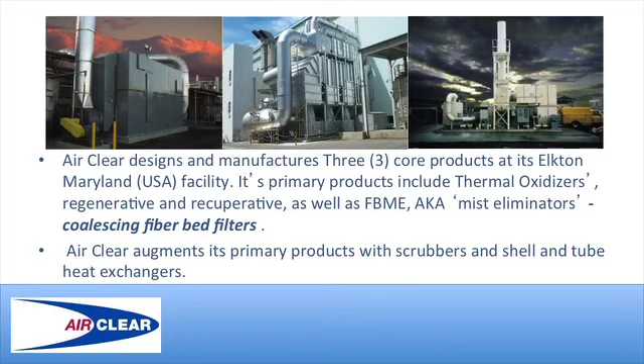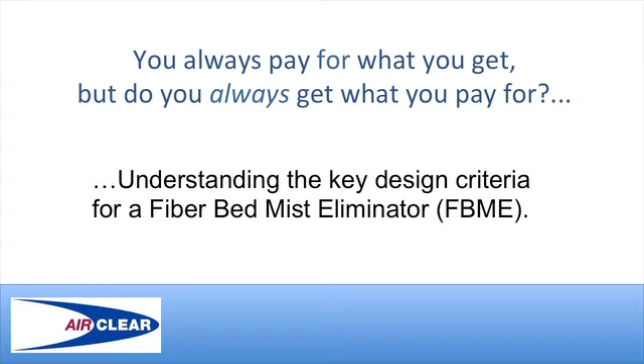Even when you get what you pay for, did you get the most value for your money? Yes, that may be a better way to phrase the question. But regardless of how you state it, understanding the key design criteria for the design of a fiberbed mist eliminator is an essential step to a successful project.

Rich, some of our participants may not fully understand exactly how a fiberbed mist eliminator works. Can you explain the primary mechanics involved in the filtration process? The fiberbed filters work by interception, impaction, and Brownian motion. Each removes particles in different size ranges and allows the liquid aerosol to be coalesced into larger droplets where gravity can move them down into the bottom of the sump.

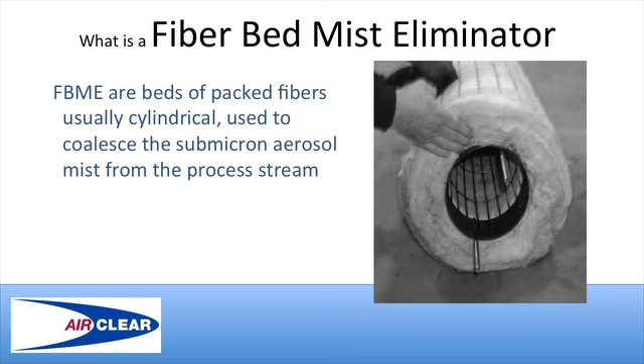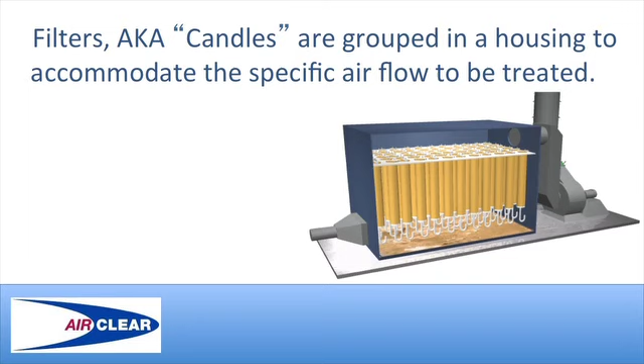The filter elements themselves are referred to in many different ways. The name candles came about because of their long cylindrical shape, similar to a candle. Fiberbeds, coalescing filter, fiberbed mist collectors, or just plain filters - all of these names are used interchangeably. The number of filters is determined by the airflow, cubic feet per minute, and the design velocity range selected.

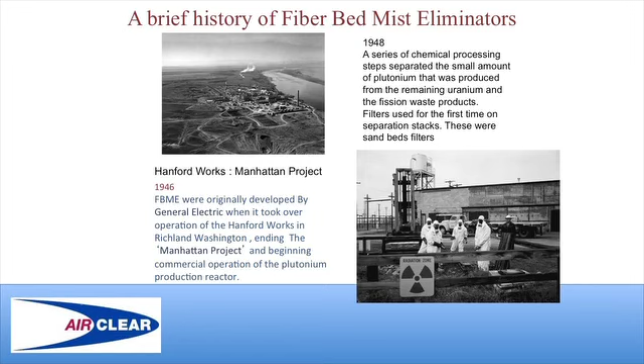To best understand this time-proven technology, I think a brief look at its origin would be worthwhile. The mist eliminators were developed at the Hanford Project in Washington in the late 1940s. They were doing some work for the government where they had some aerosol mists that they definitely did not want to get into the atmosphere. So they developed the research project to come up with the best filters to remove aerosol mists. The final design report, which was developed by General Electric, who was the contractor for the Atomic Energy Commission, is extensive and full of great technical data collected during the research and development phase.

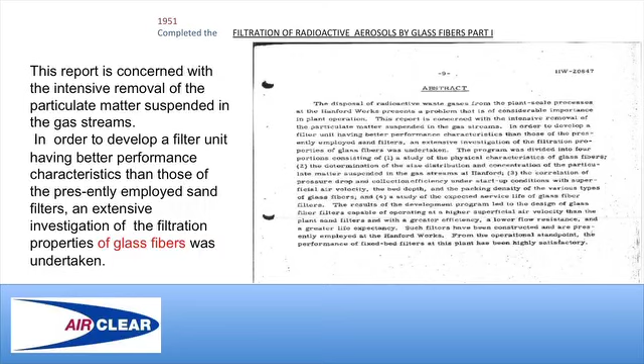I find the way the team worked together to find a solution to a very difficult process is very impressive. The detail that they went into in this test was very impressive. For example, they changed the conditions of the superficial air velocity, the bed depth, the packing density, the types of glass, types of fibers, and a study of the expected service life of the glass fiber filters.

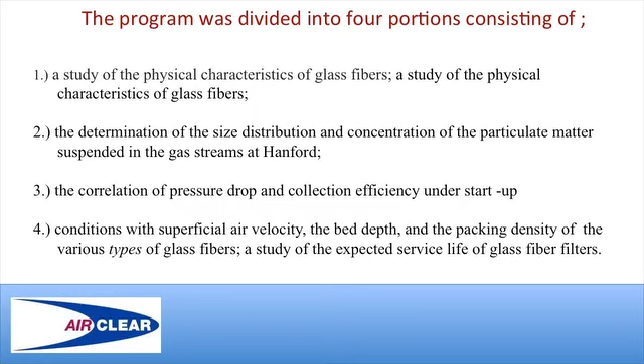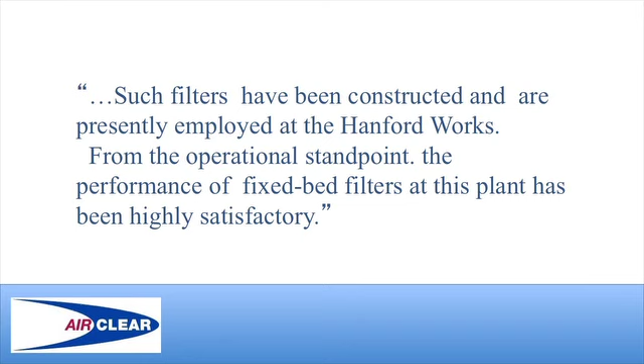Literally, we are just hitting on a few of the key points in very general terms in this discussion. The background is important because the design criteria investigated and developed by General Electric and the AEC at that time are still in use today. The bottom line from this study, as we can see in this statement, is the team was very pleased with their findings to develop a filter that removes such a high percentage of the aerosol mist.

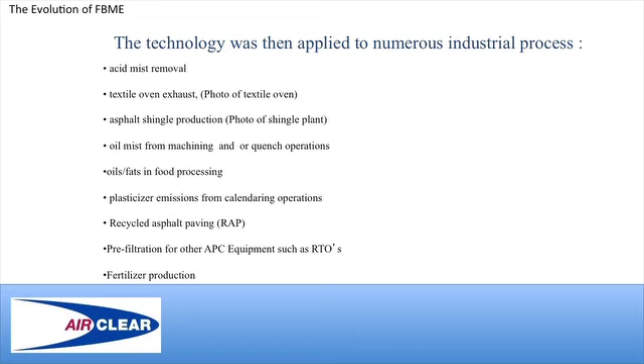As so often happens with technology, over the years it is adapted and applied to other areas. And as technology evolves, it moves into different industries and becomes an industry in its own right. And that's really what happened with fiberbed mist eliminators. Numerous processes have been cost-effectively filtered, preventing incalculable tons of emissions from entering the atmosphere.

Okay, we know now how well the fiberbed mist eliminators work and for how long they have been doing this job. There are really three primary objectives that are critical in designing an air pollution control system. Well, first, an engineer has to be certain that the performance will meet the air emission regulations that they are required to meet. And next, he also has to minimize the cost. Throwing money at a problem seldom is a good solution. And finally, the engineer must want a system that has minimal impact on the bottom line, low operating cost and maintenance cost. Yes, and that's how we all keep our jobs.

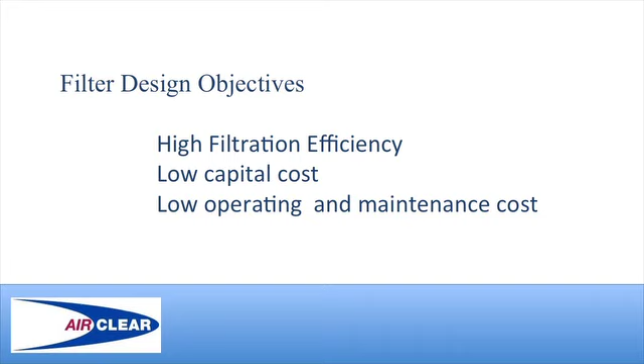Let's look at the most important aspects for the design of a fiber mist eliminator. Design of the fibers themselves relates to the system's overall efficiency and durability.

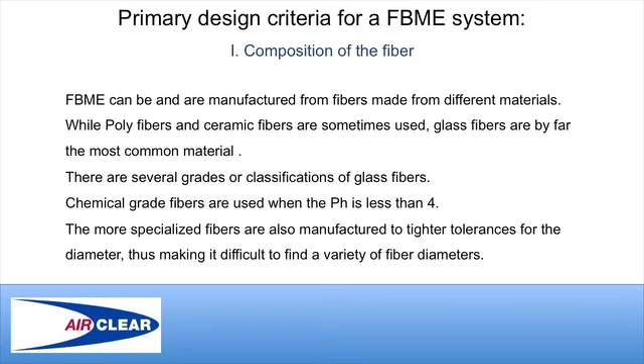The fiber diameter and the material used to make the fibers are key elements in the design. True, but the selection of fiber diameter and material are generally outside of the plant engineer's control—they are under the system provider's fundamental design. Yes, but asking the right questions about the fibers can help avoid a costly mistake.

The Hanford report does a great job of explaining how important the fibers are in the removal of particulate. Smaller fibers, less than 5 microns, contribute to removal of submicron particulate, and they generally restrict the fluid drain rate. 5 to 15 micron fibers remove large particulate and facilitate fluid draining.

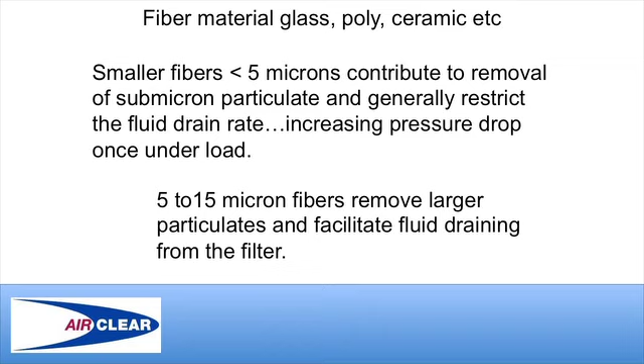Speaking of the importance of fiber selection and the technology evolving over time, I'm very excited about a new high-temperature ceramic filter which works up to 2,500 degrees Fahrenheit. Although these filters are not used for aerosol, they do present new opportunities for high-temperature filtration of solids.

The report tested various bed depths, with some up to a foot thick. It may seem odd to us now, but remember they had sand filters several feet thick that they were replacing, so 12 inches was reasonable for their research. Now, once again, the bed depth falls largely into the system provider's design criteria, but it is important to understand the impact that bed depth has on the design.

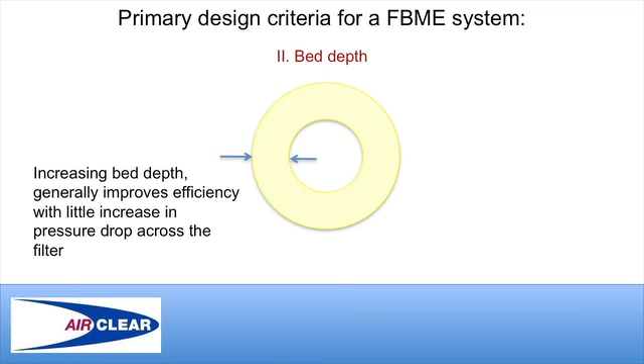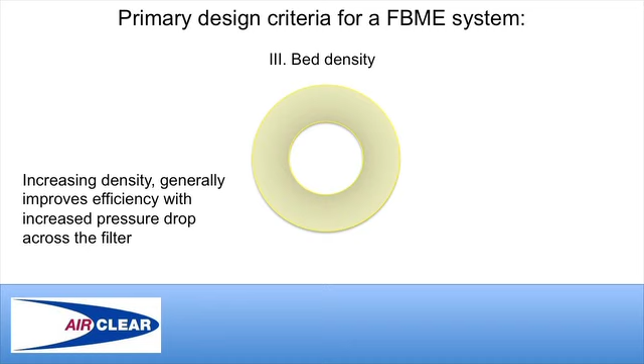Yes, but we have a few special designs, each unique to a customer's process. As a rule, increasing bed depth generally improves efficiency with little increase in pressure drop across the filter. Bed depth and bed density generally work together with respect to efficiency and pressure drop. Yes, they do—you can increase the density. Increasing density generally improves efficiency with an increased pressure drop.

Surface area is really where decision makers have a choice in the design process. The Hanford report demonstrated that fiber bed mist eliminators have a substantial operating range—that is, they function in terms of collection efficiency between 10 and 40 feet per minute. Increased surface area equals slower bed velocity, improved draining of liquids, thus a lower pressure drop.

Increased surface area also means that there is more dirty side surface with more holding capacity for solid particulates if they are present. Generally, it is a safer design that is adaptable to more processes. Slower bed velocity is also the most costly option. But is it? Certainly it is more costly capital cost-wise, but how about total cost?

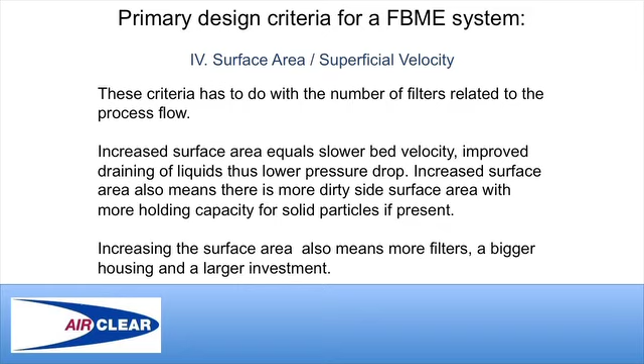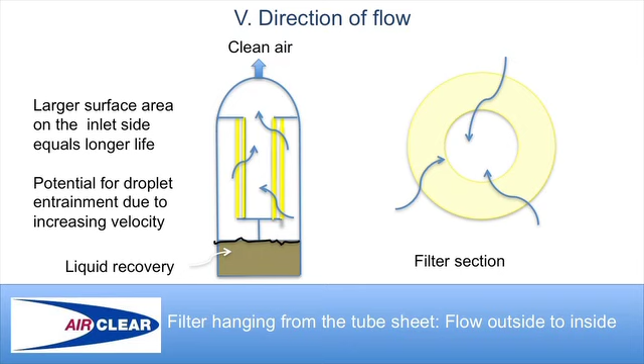There are a couple of ways to support the filters. With hanging filters, you have a larger surface on the inlet side, which equals a longer life. Please note the liquid recovery section on the left illustration. When the mist is coalesced into liquid droplets, the drops drain down into the sump and eventually have to be removed. The filters can sit on the tube sheet, and this method drains well, but in general it has a shorter life because there is less filter area on the inside diameter versus the outside diameter.

There is also less potential, however, for droplet entrainment due to the decreasing velocity as the air moves from the smaller inside diameter to the larger outside diameter.

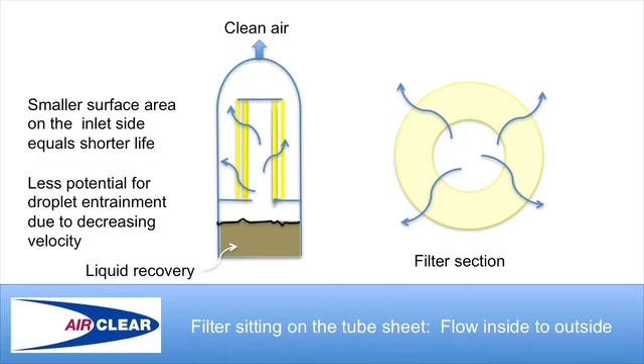So how does the selection committee use the design criteria to make a selection on competing systems? That's really the question. Let's take a look at a very real case study where we associate costs for 3 systems with different velocities and compare them side by side. We have provided a number of similar projects to this, so the data is representative and should be very useful.

It's for an asphalt roofing saturator and coater: 10,000 ACFM at 100 to 120 degrees Fahrenheit, moderate aerosol loading, roughly 5 pounds per hour, operating 4,000 hours a year, with electric cost at 12 cents a kilowatt hour, and 3 flow velocities across the face of the filter—15, 30, and 40 feet per minute.

The curves in the Hanford report that correlate velocity with pressure drop were also helpful here in defining what the pressure drops and subsequent energy costs will be at the different velocities.

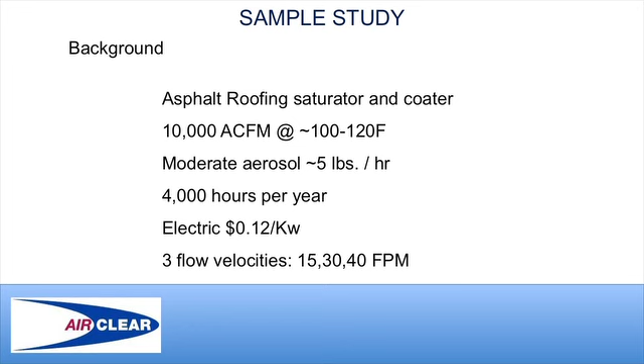Moving over to the third column, we've converted that into kilowatts. The next column applies the 12 cents per kilowatt, and we get dollars per hour. Multiplying by the 4,000 hours a year of operation, we finally end up in the final column with electric cost per year. So as you see in the first line, we have $4,117.92 if the filter system were to operate at 2 inches of pressure drop for the entire 4,000 hours. These pressure drops are average pressure drops as we apply them down in the next few slides.

The 22-inch extreme on the bottom equates to $19,264.70. So you can see the effect pretty dramatically that pressure drop has on the operating cost.

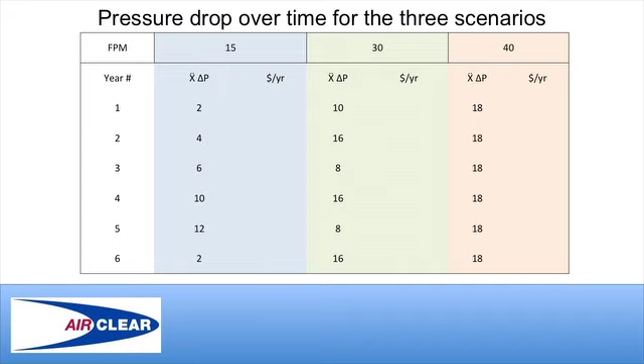In the other areas under the 30 feet per minute, the pressure drop is 10, 16, 8, 16, 8, and 16. The reason for these different pressure drops has to do with the life of the filters, when they reach capacity and have to be changed out.

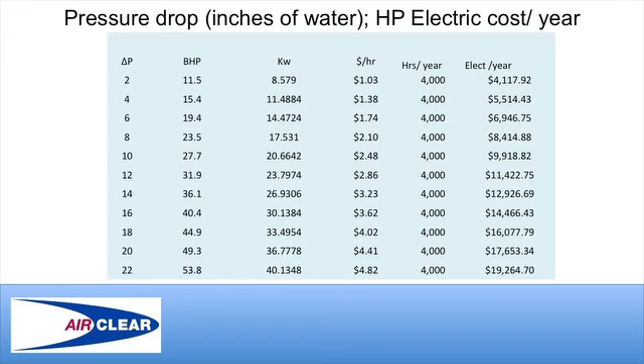We're jumping back to the previous slide for a second just so you can see where the operating cost comes from for the different pressure drops. You'll see the delta P on the left, and on the right side the electric cost per year.

In the 30 feet per minute, the filter pressure drop averages 8 inches at $8,415 per year, and the 40 feet per minute, 18 inches at $16,078 per year. So you can see the effect of having a higher velocity, higher pressure drop system is costing more per year for electric use.

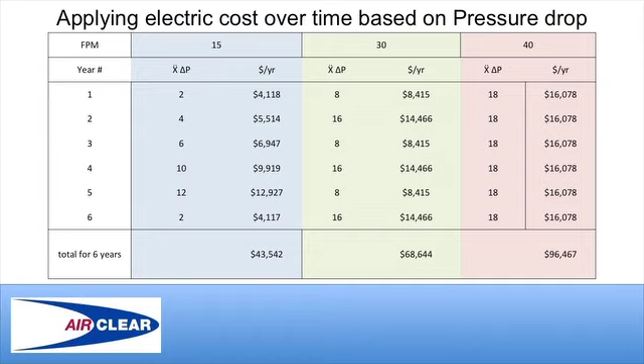The difference in these electrical costs is substantial when we add it up over the life of the equipment. Another major contributor to the overall cost of the unit is the filter replacement cost.

With the 15 feet per minute, there are more filters, so the filters last longer. There's 40 filter elements, and the replacement cost at the end of their 5-year life is $30,000.

With the 30 feet per minute, there's only 20 filters, but you have to replace them every second year, and that's $22,000 every time you replace them.

With the 40 feet per minute face velocity, there's only 15 filters. You have to replace them every year, at a cost of $19,700 for the filters.

The pressure drop and the replacement filter cost are interrelated because the fan horsepower is finite, and once it reaches the filter's capacity, the filters need to be replaced to allow for the flows that we need. In other words, as the filters restrict and the horsepower is at capacity, we can no longer get the flow, so we have to change the filters.

Also, increased velocity means that the draining is slower, which also affects the delta P.

The filter life at the 15 feet per minute face velocity for 40 filters is 5 years versus 1 year for the 40 foot per minute face velocity. When you think about it, a 40 feet per minute system has to do the same amount of work as a 15 feet per minute system with less filters and less surface area.

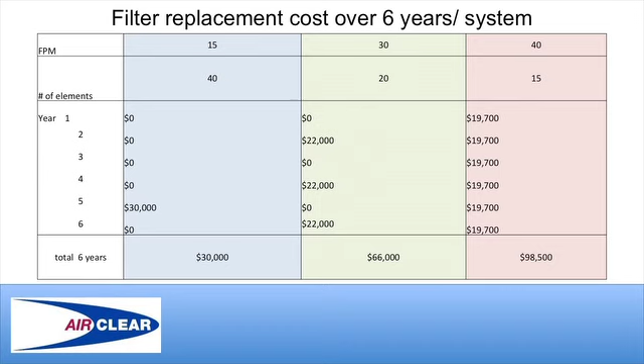After a 6-year time period, your 15 feet per minute filters total cost of ownership is $188,000. The 30 feet per minute total cost of ownership is $224,000. With the 40 feet per minute, total cost of ownership is $259,000.

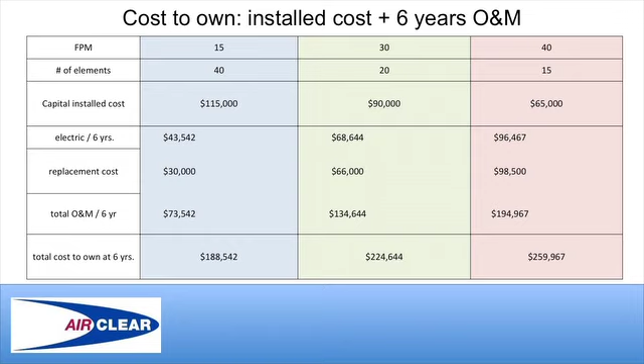That's based on 6 years, and really, that period could be extended out somewhat. We have some units out there approaching 40 years of operation. I'd say 20 years is a very reasonable average life for these types of systems. It's obvious, if you have the capital, it's a good long-term investment to go with the slower velocity design.

The case study we just reviewed deals with some real applications. However, it's a very straightforward case. The process temperature was an ideal 100 to 120 degrees. But we know there are other factors that sometimes influence system cost as well.

Yes, as mentioned, temperature is one big factor. However, in some cases, solid particulate is a big issue.

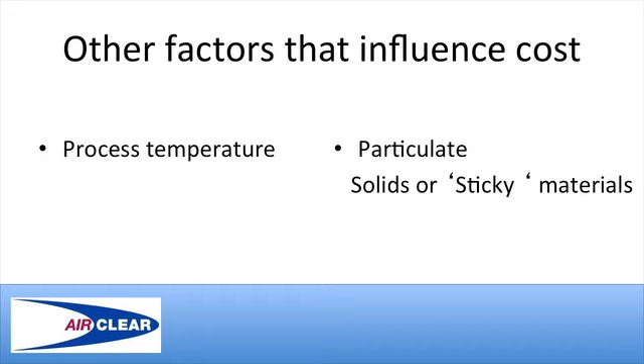Rich, perhaps you can explain how the process temperature impacts the design of a filter fiberbed mist eliminator.

Sure. Remember that a fiberbed mist eliminator is a device used to remove liquid aerosol from processes. An aerosol is a liquid droplet. Therefore, if the temperature is too hot, the organic material, oil, etc., is in a vapor form and will pass through the fiberbed without coalescing, and therefore not be removed.

The question is precisely what temperature do we need to be at to achieve the desired results? The answer varies based on the materials to be removed, but in general, a process temperature of around 120 degrees will give us about 99% removal efficiency of 0.1 microns. So remember, cooler is better.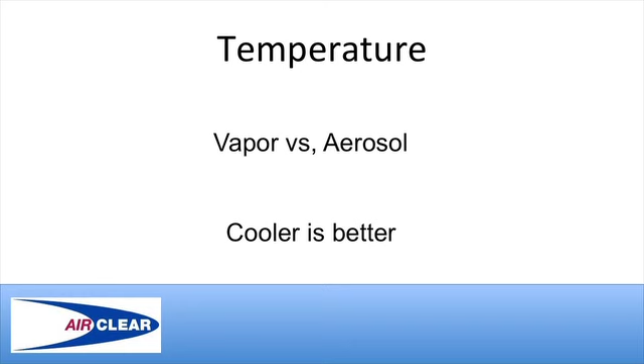There are a few different approaches used to lower the process temperature when it is above the desired operating temperature, but generally we focus on 4 methods. I'll briefly try to explain the 4 methods.

You can add dilution air to the hot process air, and the 2 streams together will come down to the desired 120 degree temperature. The next option that we use occasionally is an air-to-air heat exchanger, where we'll cool the process air with ambient air in a tubular heat exchanger.

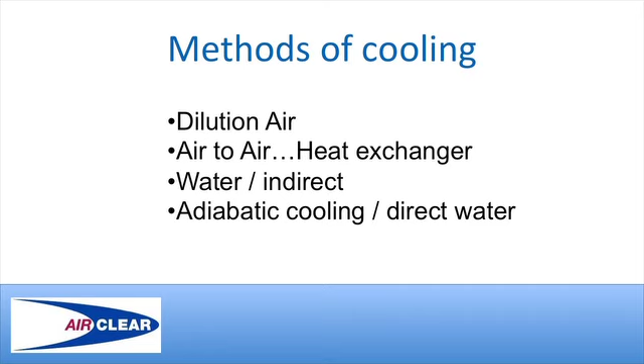The third option is to use a fin-coiled or non-fin-coiled cooling coil, where you'll run water or another cooling medium through the coils, and the air passes over the outside of the tubes and gets cooled by the water on the inside. The fourth method would be adiabatic cooling, where we spray water into the air and the evaporative cooling will reduce the overall process temperature.

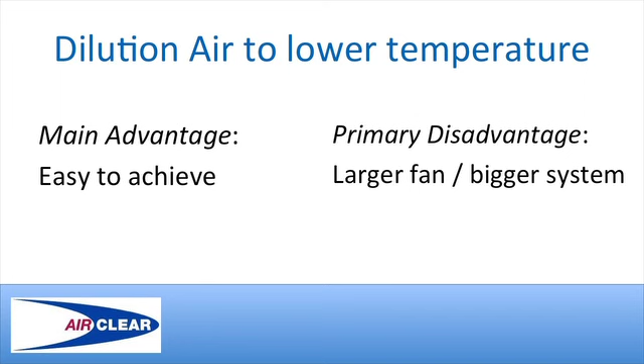Dilution air is generally used when the process flow is smaller or when the temperature is close to the desired design temperature. The downside is it increases the size of the filter unit because the dilution air and process air move together through the system and must be run through the filters at the design face velocity. What you're looking at here is an ambient air inlet damper on the inlet to a unit.

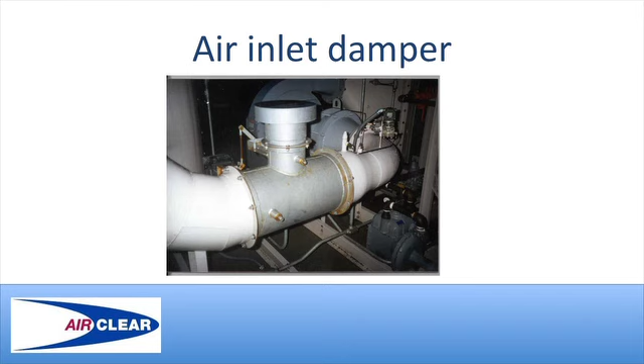It's temperature controlled to vary the amount of ambient air needed to maintain the correct temperature going through the filters. The next option is to use an air-to-air heat exchanger, where we blow ambient air over the outside of the tubes and have the process run through the inside of the tubes, reducing the temperature down to the 120 degree desired temperature.

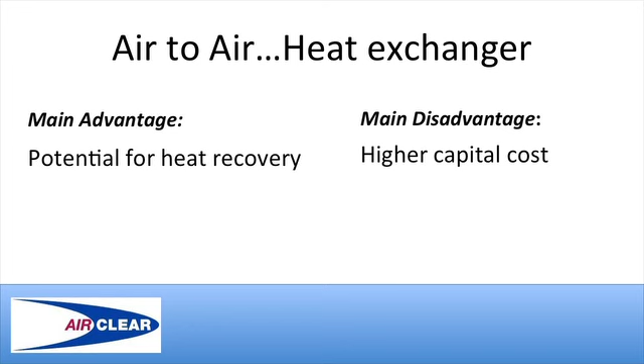This is a great approach when there's a use for clean recovered heat somewhere in the nearby building. In this slide, you're looking at a pictorial of a system with an air-to-air heat exchanger.

On the bottom left, you have an ambient air fan, which blows air over the tubes, and the process comes in and flows down through the tubes so the tubes can drain and be easily cleaned if any particulate collects in them. You'll blow a much higher quantity of air, SCFM, over the outside of the tubes so that you can get the process down to 120. So there'll be a larger volume of air going as cooling air, and the process will be the smaller volume.

Of course, when we do this, we're adding a lot of equipment. We've got a heat exchanger, another fan, and also the controls to maintain the temperature balance that we're looking for. So unless there's a need for that clean 240 degree recovered air, this generally is not a good way to go because of the additional cost.

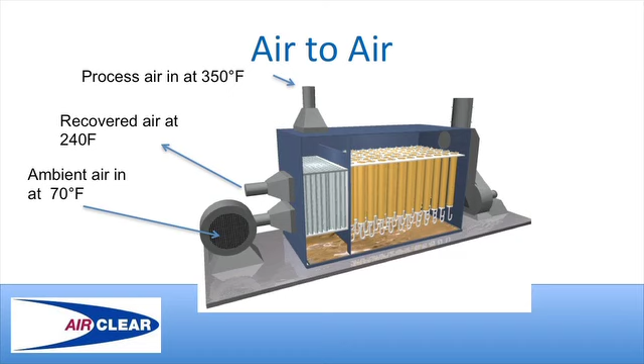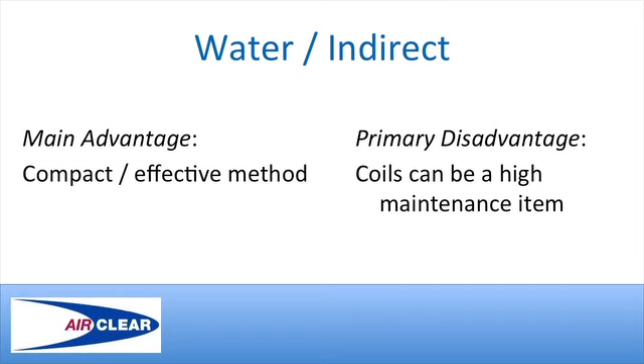By indirect, we mean that the air and the water do not come in direct contact. This is similar to the air-to-air, except in this case, the cooling medium is achieved by putting water on the other side of the heat exchanger. This is a good approach when the airstream is free of solid particulate, but it can be a maintenance problem otherwise. Also, to be cost-effective, it's good to have a need for the heated water.

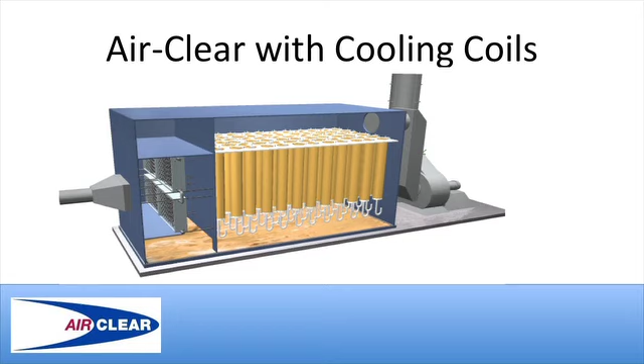In this pictorial, you see the dirty process comes in on the left side of the slide. It goes over the outside of the tubes of the cooling coils, and the water's on the inside of the tubes. As the water in the cooling coils absorbs the heat from the process, it reduces the temperature down to 120 degrees. Then it flows out of the cooling coils and goes through the coalescing filters, and then after going through the filters, goes over towards the process fan inlet.

Adiabatic cooling, or evaporative cooling, is when there is direct contact with the water and the hot air. This is a very effective means to lower hot process temperatures. In some textile ovens, the exhaust air temperature can be as high as 350 degrees Fahrenheit. Even higher, in some heat set ovens, the temperature can be as high as 400 degrees.

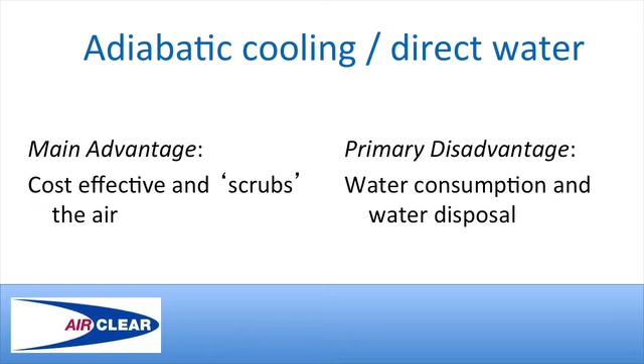The secondary benefit of this method is you get additional scrubbing of the process. Yes, that's true, especially when the particles are large inorganics such as stone dust or fibers.

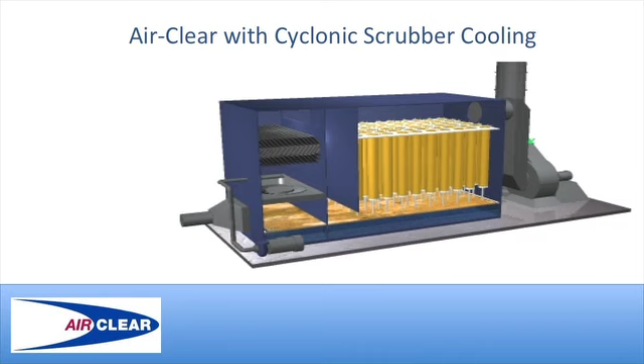When cooling is required, I would say that this is probably the most frequently used cooling process because it is cost effective and is very efficient at cooling.

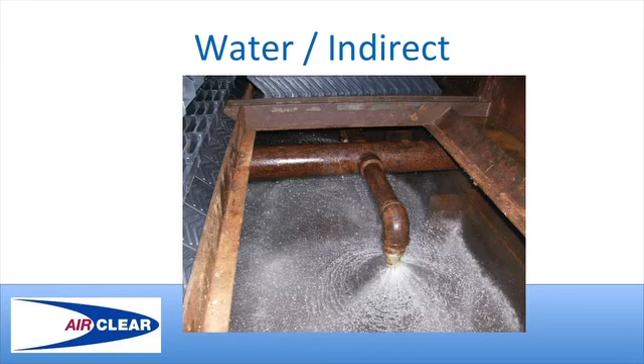What you're looking at here is a picture of the spray nozzles spraying the water down onto the cyclonic scrubber. We have removed one of the mist eliminators so we can get a view of the spray nozzle.

Another potential parameter for cost impact is the control of any solid particulate. If it's present, the particulate can blind the filters and drastically reduce the life of the filter elements.

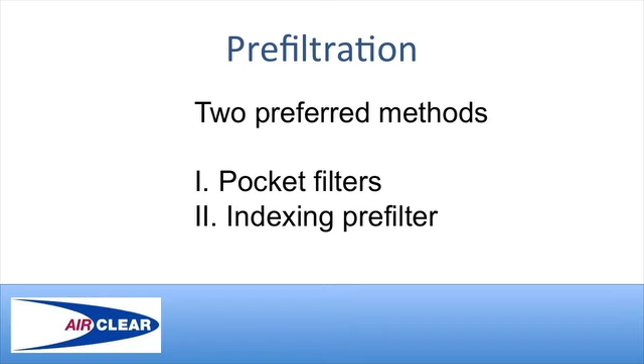As we stated before, as years went on, we've applied these fiber beds to different applications. Some of the applications these filters were put on had problems with solids in the exhaust. But fortunately, the problem has been efficiently addressed with two methods of pre-filtering these solids from the airstream.

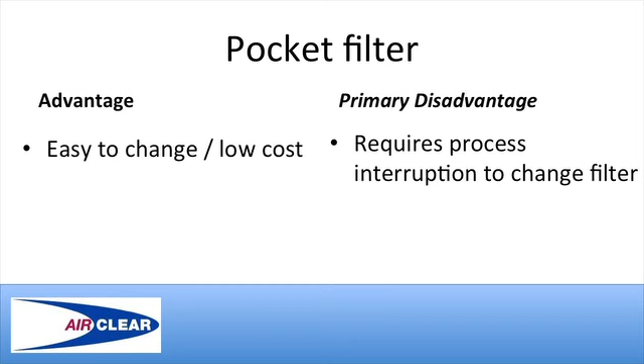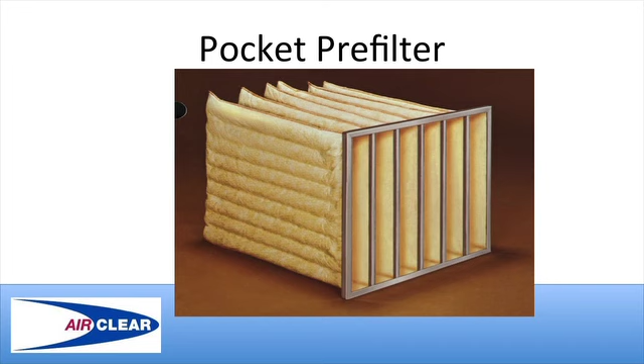Each individual filter panel can handle about 2,500 CFM of air. With larger flows, we group multiple pre-filters together. The largest grouping I recall is 20 pre-filters. At that point of 20 filters, the space needed becomes substantial.

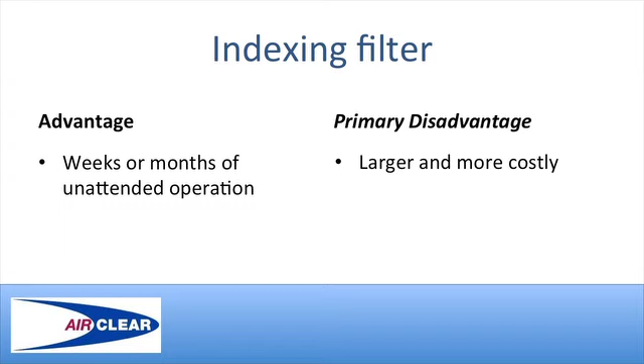The indexing pre-filter solves the footprint problem with the use of a drum. This method provides a large surface area in a fairly small space. While the indexing pre-filter is a more costly approach, it provides for weeks of uninterrupted operation.

In this slide, you're looking at an indexing pre-filter that's a standalone. The inlet would be on the top. The flow is through the drum and then comes out the end of the drum as pre-filtered air with the solid particulate removed. There's a roll of clean media on the top, and then there's a roll of dirty media. As the media gets dirty and the pressure drop starts to go up, we have a pressure differential switch, which will initiate a timer to turn the drum and roll on clean media. So the pressure drop goes down again until the media gets dirty and needs to be indexed again.

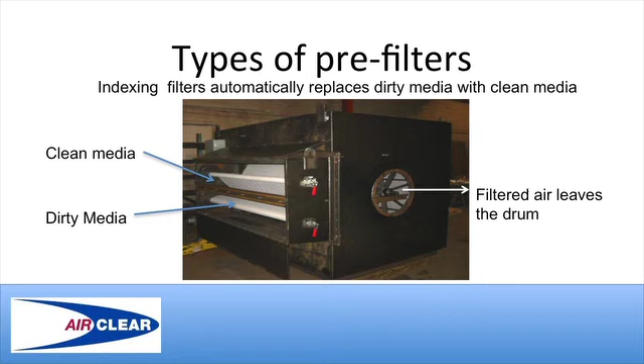The addition of the cooling section on a Fiberbed Mist Eliminator is necessary when the process temperature is too hot for effective filtration, but the pre-filter isn't essential. That's true. The decision whether or not to include a pre-filter is based on extending the filter life of the main elements, not about performance of the system.

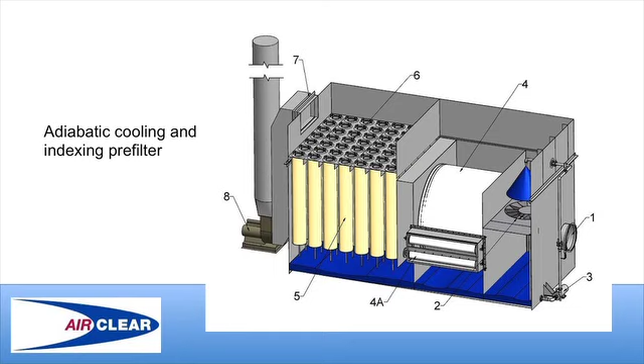Additionally, in the case of the indexing pre-filter, the dirty media changes frequently to keep pressure drop low, so you're saving on electricity as well.

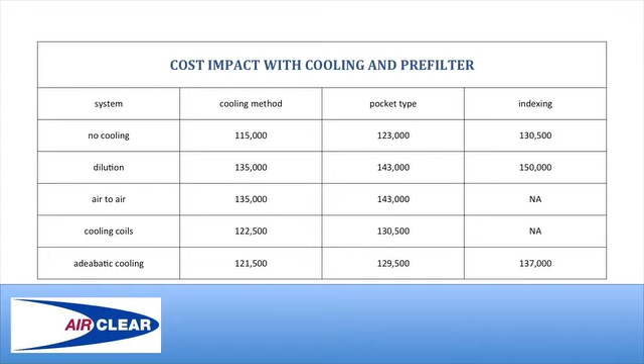Yes, that's correct. In every case, the pocket pre-filter is a lower cost option. The long period of uninterrupted operation can quickly justify the cost difference of the indexing pre-filter.

There are a lot of parameters that should be considered when designing or selecting a fiberbed mist eliminator. Of all the very important parameters we've touched on in our discussion, which ones do you feel are the most important, that have the critical impact on a particular project? It's hard to say. Certainly, number 4, surface area versus velocity, impacts the price as we detailed earlier, but temperature must be addressed when it is above the 120-degree threshold.

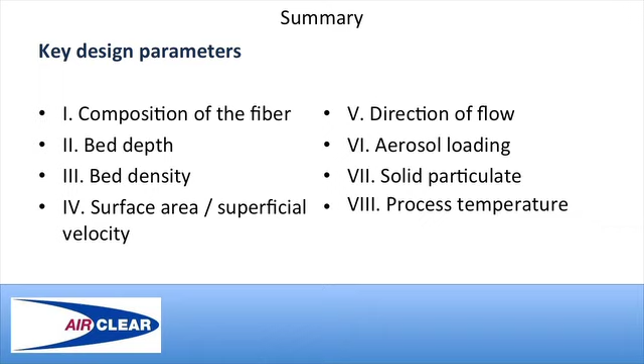Yeah, I would agree with number 4, but not far behind is a solids issue. I've seen similar projects have vastly improved filter life, and therefore cost to own significantly improved, by addressing the particulate issue with a pre-filter.

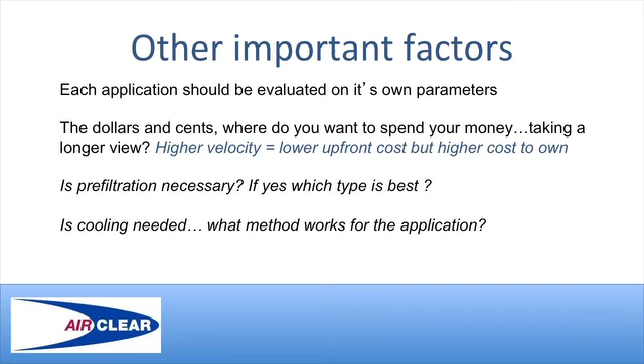What this comes down to is collecting as much process information as possible and applying it to design. Definitely, a case-by-case evaluation is essential. Asking the right questions and having enough knowledge so that you understand the answers you are given will help you quantify your selection and greatly improve your chances of a successful project.